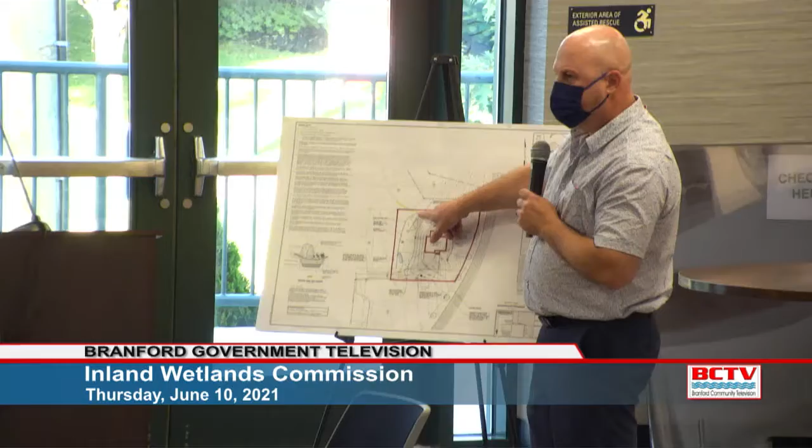This green dashed line is the edge of the 100-foot buffer, so you see it's just touching this lot. We have everything outside of that. The rain garden we've been using is shown.

Typical erosion controls, silt fence. The construction entrance is actually at the end of the common driveway. Pretty simple.

Hopefully we can get through these and move them to agent approvals as we have with the other lots, so keep your agenda for the public hearing next time short.

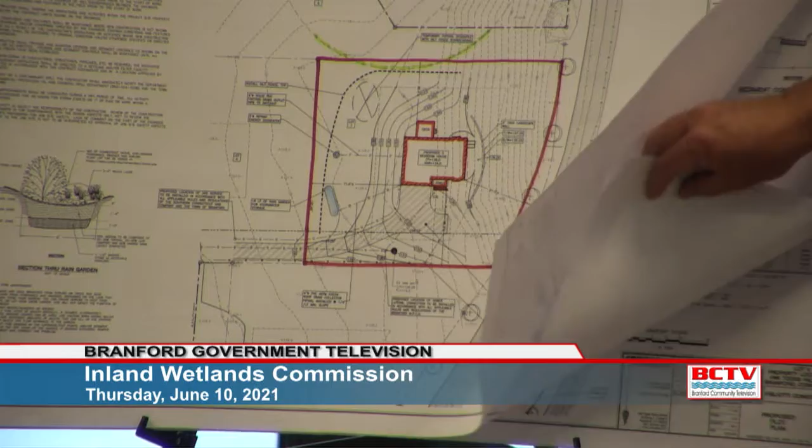We'll do them one by one. This third one is probably the one you guys want to look at the most. Does any commissioner have an issue with lot 1 for agent approval? No, agent review and approval should be fine.

Is that a motion? Do we need a vote on each one of these? General consensus is fine. All commissioners that feel agent approval is appropriate for lot 1? Aye. Any opposed? Okay, next one.

So this is lot 5. Again, the house is sort of in the center, given the building setbacks we're dealing with. This green dash line is the 100-foot setback from this wetland area. Basically we're just extending the silt fence into that area, grading right up to it, very close, but we really don't have any activity within that 100-foot upland area.

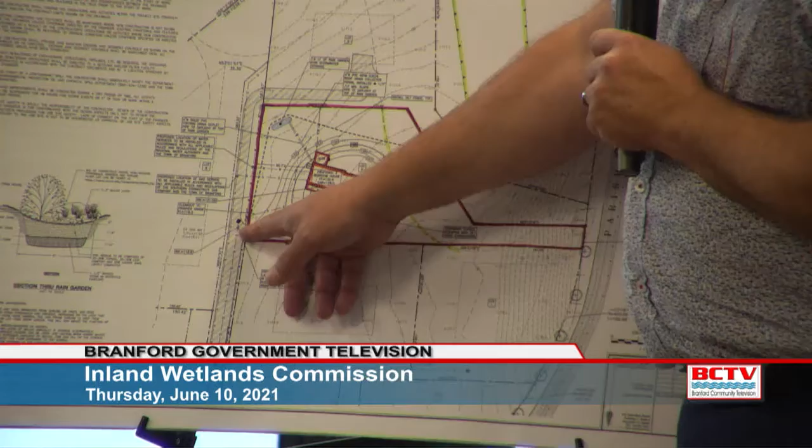Again, the rain garden we've been using on this one. So this one's self-contained, the footing drain and roof drain are here in the rain garden. Again, typical erosion control, silt fence. This one also comes off that common driveway, a different common driveway.

No wetlands on the site, no. You're just in the upland review area, that wetlands finger that's up here, within the 100-foot. The contours are moving downhill as you go up the sheet and away from the upland review. This whole subdivision is basically a bowl that goes down to the pond, so everything kind of goes away from the roads.

Again, what's the capacity of the rain garden in a heavy storm, Jim, how does that function? So they're designed to fill up and leach into the ground. We over-excavate and put in looser material. During a 100-year storm, people are on the roof, they're not looking at the rain garden, but...

Because we're spreading it out through this thing, it will more or less sheet flow out instead of a point source discharge out of the gutters. In this case it'll actually go across the driveway first, then down to that. Downgrade? Yes, okay.

Another one looks like agent approval. Is that what you're saying? Agent approval. Does any commissioner have an issue with this being agent approval? All in favor? Aye.

And this is lot 6, the furthest one down. Again, house in the center, typical silt fence, erosion controls. This one also comes down off the same driveway as lot 5. This tail here is just frontage for this lot, but it's inaccessible because of the slope here.

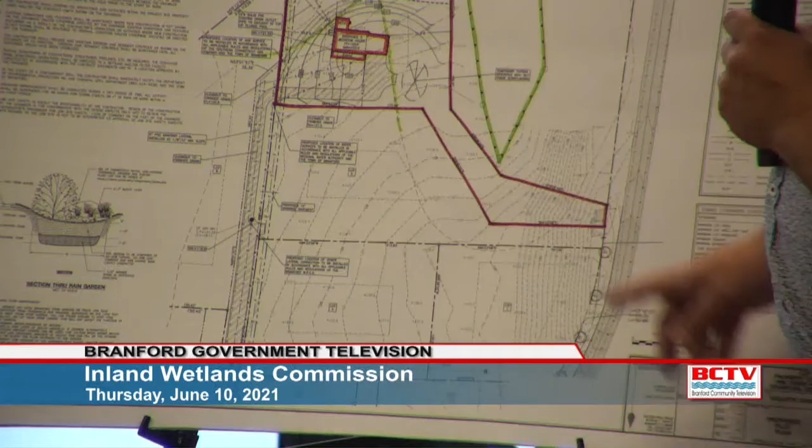So the thing that's changed with this one is that we're hopeful to provide a common footing drain for a couple of lots, because up here the lots are so flat that we don't have enough grade to daylight a footing drain without a pump. So we're hopeful to combine, I think it's lot 3 and 2...

in this lot, and have one riprap outlet area that's 5 by 15 feet long, plenty long enough to dissipate the energy, and we would have an easement across these lots, but not having a pump is a big deal for people right now. So from what you had seen at the subdivision level, that's the only real change here, that we're going to have a drainage easement and an outlet for 3 of the footing drains, which at times right now may not even be running at all.

This is Commissioner Basserman. What's the maintenance plan for that drain?

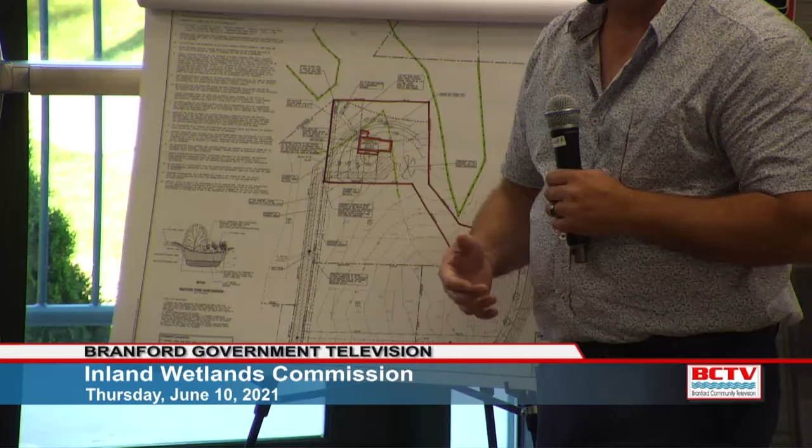Well, it'll be riprap. As long as the outfall is riprap and the weeds get knocked down once in a while, it'll be fine.

Is there any indication on who's responsible for knocking down those weeds? It will be on lot 6, so my understanding is that it'll be part of their maintenance, but the other 2 lots will have rights to it, so in case he doesn't, they could go mow it themselves, just to keep the pipe open. They'll have common maintenance and installation maintenance agreements through the easement.

At the end of the day, if they don't maintain it, it'll backfire on them. It'll take a while, but it could back up. So it makes sense for them to want to maintain it.

Will the pipe be solid from the edge of the foundations out? Yes, it'll be solid all the way down to the outlet, from the foundation out, so no perforated pipe. So it's just protecting the house, it's not trying to dewater the whole place. Yeah, that's what I'm getting at.

Commissioner Basserman again. So the condition, or part of the conditions of the easement, would be the maintenance of that structure? So the 2 lots in front and this lot will all have rights for installation and maintenance of the drainage pipe, though it'll be located on this lot.

And the discharge is, so the green, these are wetland areas. That's wetland, so the discharge is essentially right into that wetland.

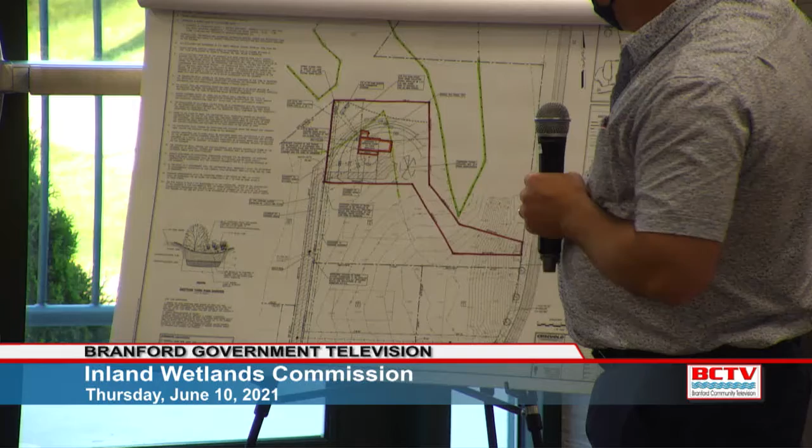So don't we need to, as a building code issue, address that you're discharging drainage off-site and onto somebody else's property, in this case the land trust? Don't we need to address that?

No, it was all going there anyway. I don't think that's an issue. We are discharging it on this lot, and that'll be in their deed that these people have the rights to drain there.

There has been kind of a lot of discharge from some of the footing drains, so I think it might be appropriate to have some condition that it should be monitored for a certain period of time, and if it needs to be adjusted, proper adjustment should be made, if that's something the applicant thinks would be amenable.

Absolutely. The other thing I'd like to ask the commission about regarding the fact that the site was by and large maintained as mowed lawn: some of the lots have now sold, and property owners are going to be maintaining their properties. There's an approved limit of disturbance on the site plans.

If a property owner wants to mow an area that has historically been maintained as mowed lawn, does the commission see that as a violation, or is that routine residential maintenance that falls under section 4 of the regulations as of right?

Can you ask that question again? So, the site has historically been maintained as mowed lawn when it was one residential lot prior to the subdivision. It has not been maintained as such in recent years while they've been going through the permitting process.

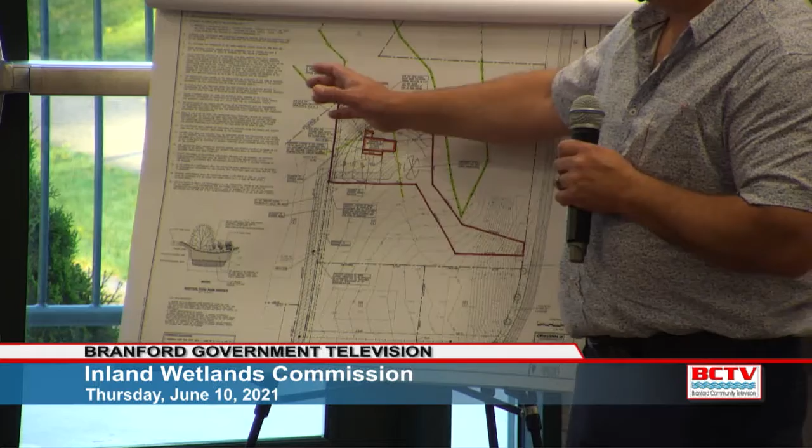So it's actually a little bit less disturbance than what was originally shown. This was going to require retaining walls to get down there, and part of the public input at the planning and zoning level was getting some of the driveways off of Parish Farm Road because of the hill coming down. So that's why we have a couple of common driveways now.

For the sake of saying so, I've seen people do remarkable things with footing drains. Can we make it crystal clear where solid pipe starts, with a notation prohibiting perforated pipe from the foundation out? Absolutely. I can just see them having a load of perforated pipe and nothing to do with it, so let's use it here. No, I understand, yeah. We'll make it clear.

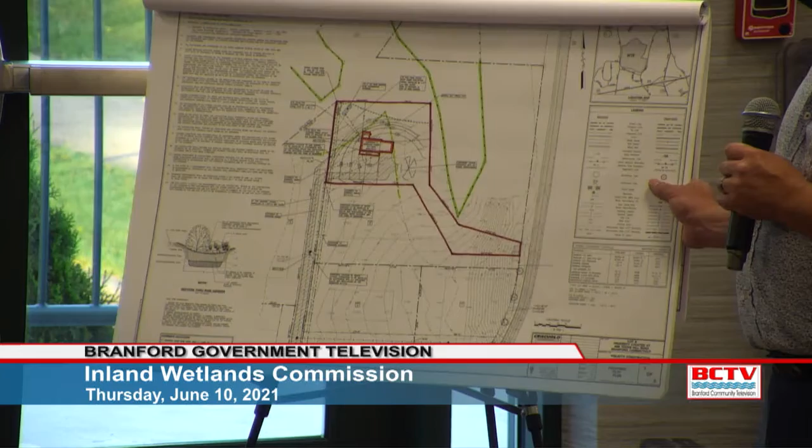All right, so if the commission's okay with agent approval, then I'll just touch base with you tomorrow on some of the conditions slash site plan revisions. So inland wetland 210505 is ripe for agent approval.

Commissioner agrees? Fine with me. Commissioner Beckman? Yep. Okay.

Next up, inland wetland 210601, 54 and 60 North Main Street.

Hey, sorry to interrupt. In asking us to agree, you referenced lot 5, but wasn't that lot 6? That was lot 6. Yeah, so you might want to restate that and ask us again, because you said lot 5. Oh, I thought he said 6. I thought he said it was inland 210505, lot 6.

Is conditioned for agent approval. Yes? Yes. Okay, thank you for the clarification.

210601, 54 and 60 North Main Street, construction of a new automated car wash. Good evening, Jim Pretti again. 54 and 60 North Main Street is directly across the street from the fire headquarters. It was the site of a paving company for many years.

Highlighted in yellow here is the existing building and the existing retaining wall. It's a precast block retaining wall, large block retaining wall right on the edge, and that's pretty much where the site's been filled to.

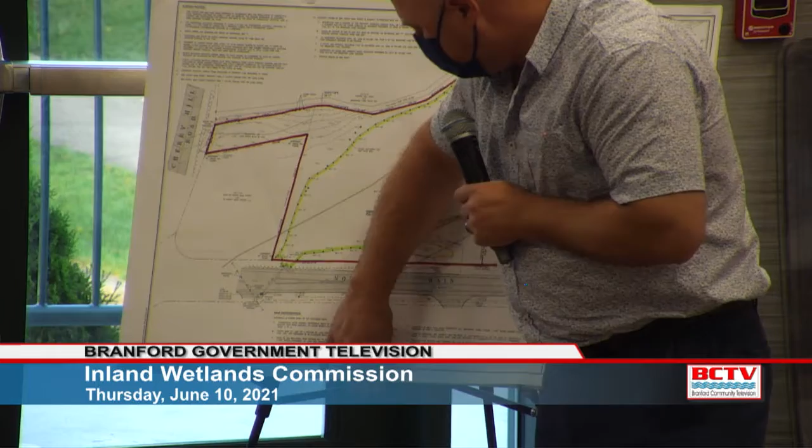There was, I guess, some story about somebody being related to Tilcon here, so they got leftovers. And in any event...

There is some various debris that's kind of scattered, reachable from outside by hand. Walk in and take out some scattered junk, I guess, that we were proposing to remove.

We're proposing to realign this retaining wall slightly behind the old one to provide a little bit of space so that once the old block comes out, we can actually put some seed in there and create a little bit of a buffer. But we're hoping to use the site that historically has been used, again, filled with trap rock.

This building outlined here is the proposed car wash. You would come in, go through, and then either go into vacuum spots and then back out, or just leave.

They are proposing some water quality basins with some infiltration possibilities. We'd have to excavate some of that out, but given all the crushed stone that's under there, I think it will probably work well. So in addition to doing some cleanup, we're going to provide some water quality improvements that don't exist at all there now.

We do know that this is for receipt tonight, and I imagine the commission would want to take a look at the site, and I would be available for a site walk. We could get that scheduled before the next meeting.

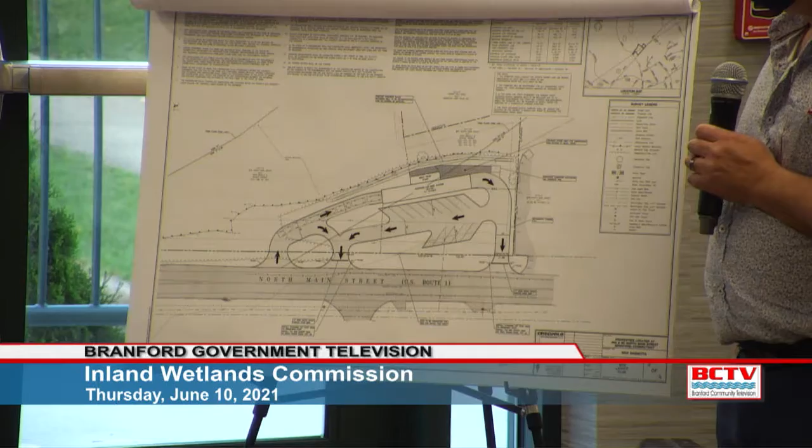But that water can go through the gravel, it can't go through this blacktop at all, right? Agreed, but it has been running basically untreated for all these years for the paving company, and now we're gonna collect it and clean it. So where will the water from all of this blacktop go?

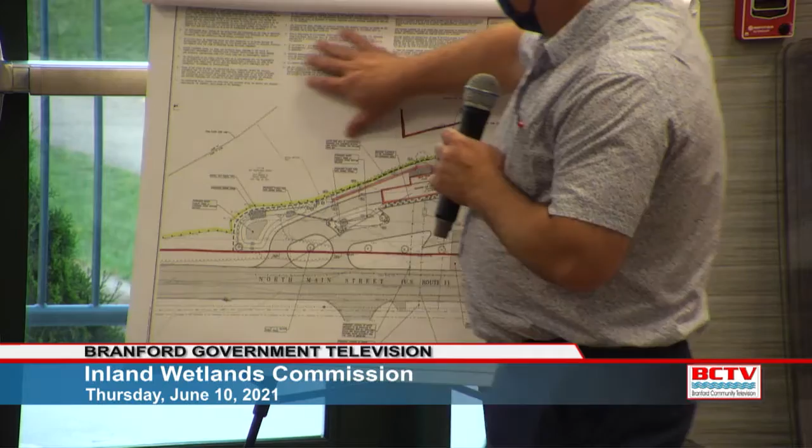That's what we're showing here. This pitches into a vegetated small area that'll connect to this, and then discharge through a stone berm out through this end over here. This all flows this way already. And stormwater can't go into the sanitary sewer?

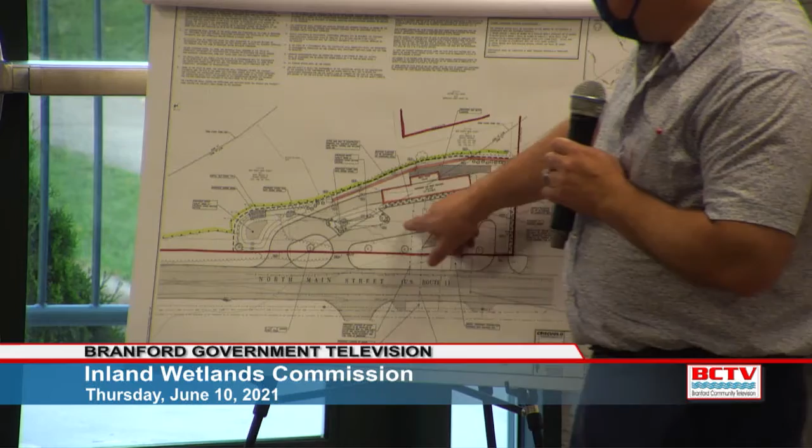No, the treatment plant goes out of the way to try to make sure that's separate. And all the paved areas are contained by curb? With the exception of where we want it to run off. It'll just sheet flow into that? Right, yeah.

I don't know, I sort of agree with Peter. If we want to take a look, we should take a look. Why don't we schedule in those that want to show up, and those that don't can rely on prior experience, and do it before the next meeting? We have enough daylight, I think, probably, right? So yeah, it's probably 6 o'clock, maybe 6:30, 6:45, something like that. When do you want to do it? June, well, what do we got? June 8th, or July 8th, right? You want to do it right before the meeting? Sure, fine with me.

What are you saying, 6 or 6:15? Yeah, it shouldn't take that long, it's right up here, right? Yeah, so, right, 6:15 on the 8th? On the 8th, okay. So before our meeting? Right, okay. And did you say 6:15? Yeah, I think it's gonna be pretty clear when you're there, we're not having to walk around vines and stuff like that. 6:15, which day? On the 8th of July. So it's right before our meeting. Okay. Is that okay with you guys? Thank you, yes.

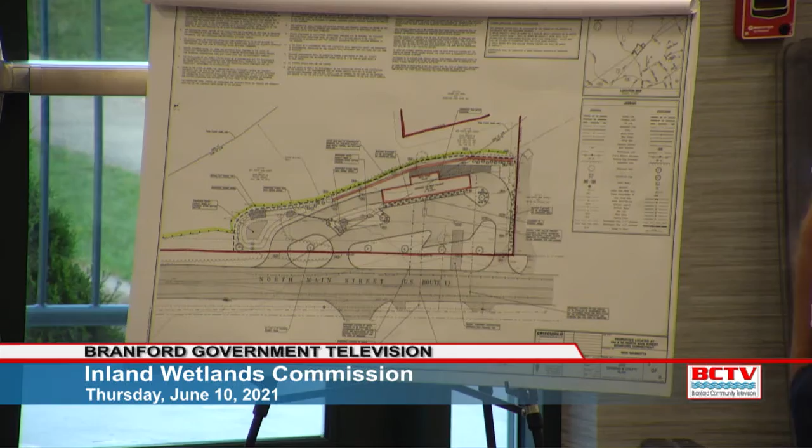Okay, Inland Wetland 210602, 173 Hotchkiss Grove Road. I guess we're demolishing an existing non-conforming house and constructing a new house in its place.

You've been busy, Jim. Yeah, it's been a little nuts.

Jim Pretti, Criscuolo Engineering again. Outlined in red here is 173 Hotchkiss Grove Road. Kind of depicted, I don't know if Commissioner Rose can see that in the corner. We did assume that, given what we've seen out there, that there were some wetlands off-site, so we had it flagged, and they're actually on this other property. The 100-foot line is out here. In yellow is the existing house, and you can see it's only 5 feet from the property line on this side, so it is an existing non-conforming house.

In the orange is the new house. It'll be within all the setback lines. The coverage is the same as what's there now. There's some existing retaining walls that will remain, there'll just be a piece of it that gets rebuilt to connect to the new house. The driveway is going to stay where it is. This house has a drive under just the same as the existing house, so there's only a little piece of new pavement area, this triangle here.

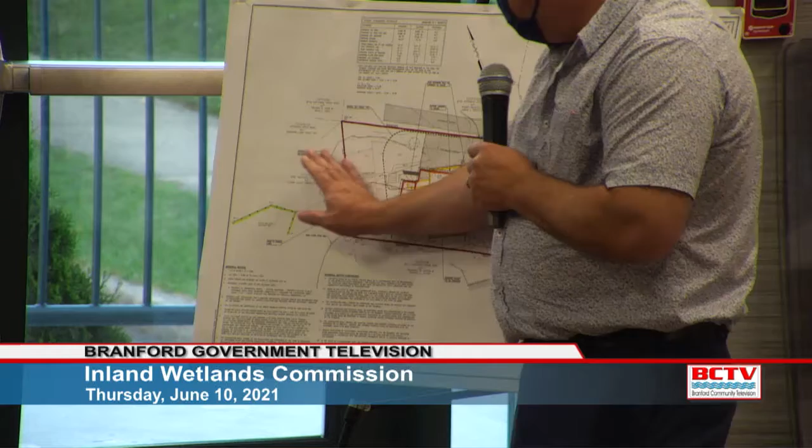So where is the wetland, Jim? It's off-site, where you are. And this is all lawn back here now, which will remain. Where on Hotchkiss Grove is it, at the end? Is that near the end? This is Hotchkiss Grove? It looks like it's between 5th and 6th Avenue on Hotchkiss Grove Road, on the other side of the road.

Oh, it's a little cape-like house. It's a little ranch that kind of sits up on the hill. Yep, it's dark green, you probably drive by it a million times. Got it. It's like at an angle, looks like they're turning it. Okay, this just came in yesterday, so I haven't really had any time to look at it yet.

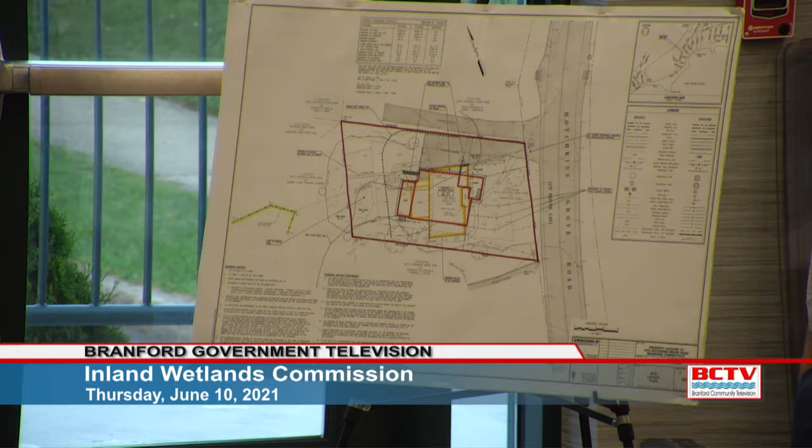But it's possibly agent approval if the commission's okay with that. Very possible. One thing, I very briefly looked at it, is there any on-site stormwater management? There isn't, but that's not to say we couldn't add it. I didn't think we were required because the coverage is the same. But we could add something at the lower level here.

There is an area that's actually out of the flood zone that's still on the lower level. Okay, so we could add some infiltrators or something there. And they're not adding that driveway that's on your map. That's the neighbor's driveway? So this is our driveway and this is the neighbor's driveway. They're already both there.

Just for clarification, Jim, this is Commissioner Vassman. The stormwater management guide indicates that if the coverage is the same, no additional stormwater management is required? My understanding was that at least for single-family residences, unless you're increasing the impervious coverage, that hasn't traditionally been required by the engineering departments in almost any town I've worked in. Gotcha, I can check with the engineering department to see what their recommendation is.

Our regulations do require management of the first inch on site. We don't require it for smaller projects, like if somebody's putting up a shed or a pool, but usually for single-family residences we do. So if the commission's comfortable, I can consult with the engineering department for their recommendation. That 1 inch is what we've been using, it's a standard requirement we have for pretty much single-family houses.